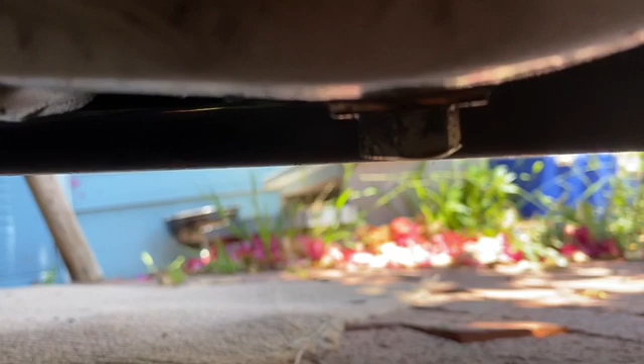Drain plug that we're looking at right here. That drain plug has been always having a little drop of oil on the bottom for about 4 or 5 weeks. So I've been keeping an eye on it, but I'm starting to notice it shift a little bit.

So today I noticed that underneath this, I'm seeing some oil, and under this screw I'm seeing some oil. So obviously driving forward, if it's mainly just leaking from the drain plug, you could get some dripping down here. But it's a little bit harder to make a case for it being so dirty up in here. That makes me think it might be coming from up above, and that maybe the gasket for this whole primary case needs to be replaced.

But I've never had this primary case taken off, so the gasket should be just fine. So what I'm gonna do right now is go buy some new primary synthetic oil, top it off, and just keep an eye on it again. But I might need a new gasket for this primary case, which doesn't make sense if it's never been taken off. Go figure.

I'm really kind of at a loss, but that's where I'm gonna start. I'm gonna put it up on the jack tomorrow, top it off with some brand new primary synthetic oil, and at least then I know I'm not running with the primary empty of oil. And just keep an eye on it, I guess. I don't know.

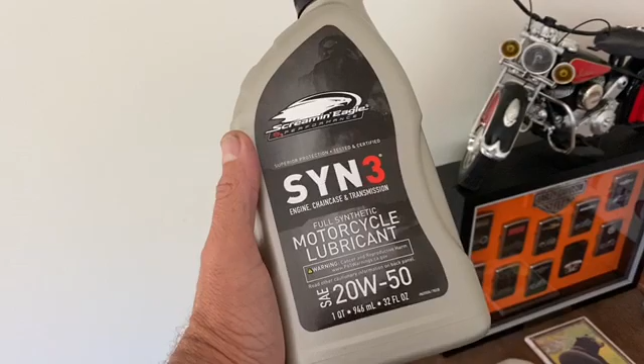Okay, so here's the plan. Can you believe this was with tax almost $15 for one thing of synthetic lubricant that will be used in the primary.

So the plan is tomorrow morning, I'm gonna go to church and confession, but when I get home from that, the plan is to really clean up the bottom of the primary, wheel it out, get it on this jack, and then let it idle. I'm gonna let it idle for 5 minutes, because if you don't have a fan to blow on the engine, you can't let it idle too long.

So I'm gonna let it idle 5 minutes, turn it off, and see if I can see where the oil's dripping from. If not, wait a couple hours, come out and let it idle again for 5 minutes. And just do that even 3 or 4 times if I have to throughout the course of the day, until I can see where the oil is dripping from.

Because I pointed out those 2 primary bolts that it appears to also be dripping from, and that would actually be good news in my mind, because the worst case scenario is there's no O-ring with the bolt for the oil pan. So the worst case scenario is the guy didn't use an O-ring and he screwed it in too tight and he cracked the primary. That's worse. That's expensive to buy a whole new primary.

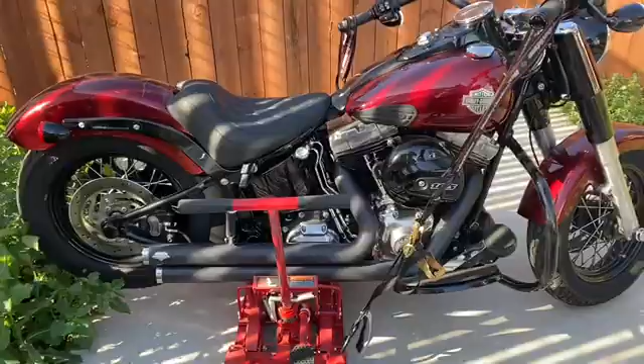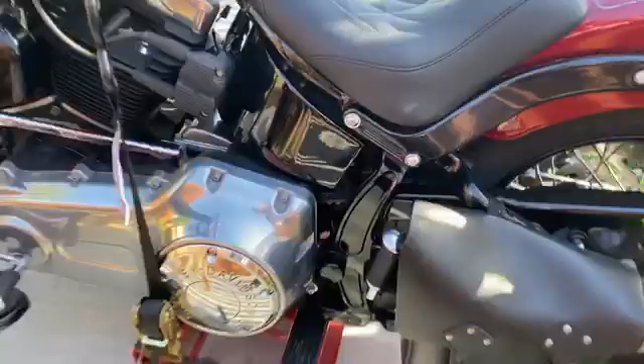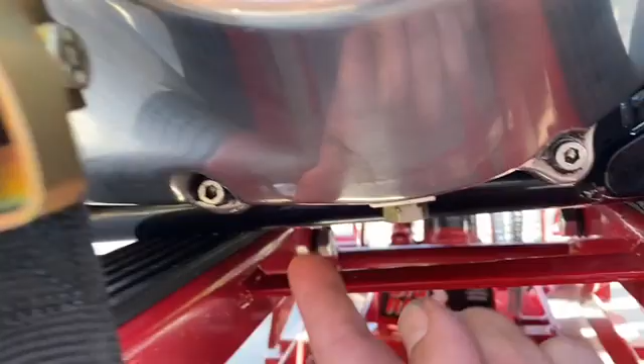Okay, so I got Big Red Betsy up on the jack. Ozzy just can't calm down. And it's real nice and clean down here. So we're gonna watch and see where it comes out. Here, here, or here. This one's really dirty. So I'm wondering if it's this one or this one.

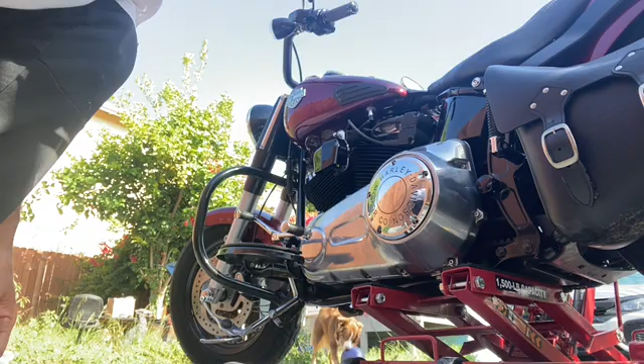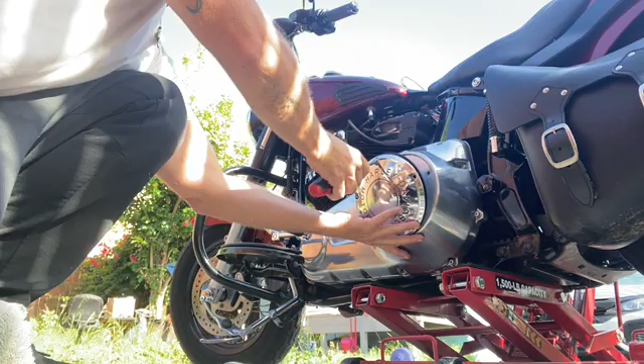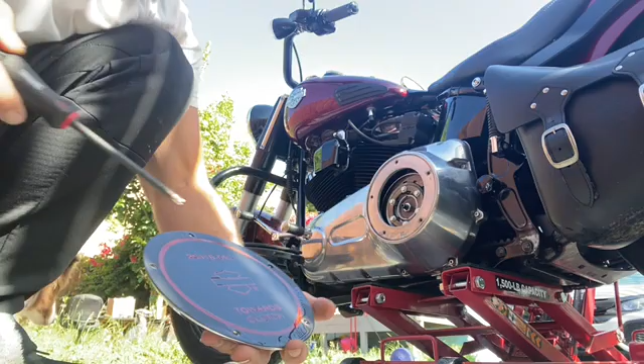Okay, so I think I found out what the problem is. Problem is, this gasket is not the right gasket. The gasket that is right is just a thin piece that goes all around the edge. So the guy didn't even put an O-ring on the drain plug. He didn't use the right gasket.

And I mean, I looked forward to this tune-up and I saved for this tune-up for a long time. And for them to just take your money and not do anything. Okay, now I'm just starting to bitch. But,

You know, I don't really understand it. Just using wrong parts. How hard is it to put on an O-ring?

And, you know, the oil is pretty low right now. It's supposed to be coming right up to the edge when it's horizontal, perpendicular to the ground like this and not leaning on the kickstand. It's basically supposed to come right up to the edge. And it's at least probably, I'd say 15 ounces low maybe, and it's only supposed to take like 31. So I think it's about halfway low.

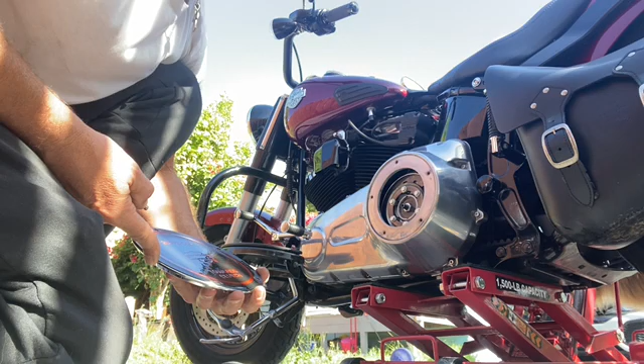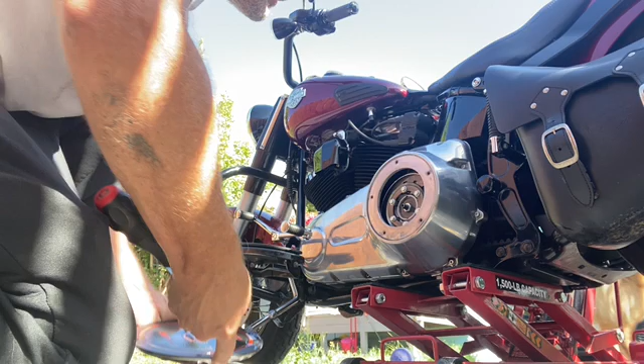So the choice is to go buy a new gasket right now or to just buckle it up. You know what? I want to ride today. I think I'm just going to put in some oil and buckle it up, because what I found was a little line going down here, but maybe I should really make sure that that's the problem. I think it is though, because look at how much oil's out here. Damn it, I think I'm gonna... decisions.

Might as well do it right. I'm gonna go get the new gasket. Might talk to the manager too. I mean, how hard is it to throw on an O-ring?

But what good would it really do? I mean, all that manager would do was go, oh, this guy's having a bad day, or this guy's in a bad mood. He won't actually do anything with it. Or think, let's see if we can tighten up our service department. I don't think they think like that.

So now I gotta wait for the Harley shop to open. Darn it, it's Sunday. I'm not even sure if they're open on Sundays. So that's what I'm gonna do next, check on that.

Okay, so as I said yesterday, this lubricant cost me like $14.95. I got the receipt for that. I'm gonna try to get them to pay for the gasket, the correct gasket, which should have been covered in my 20,000 mile tune-up, and this, because I shouldn't have to pay for this to replace all of the lubricant that I lost on the road because the seal wasn't correct.

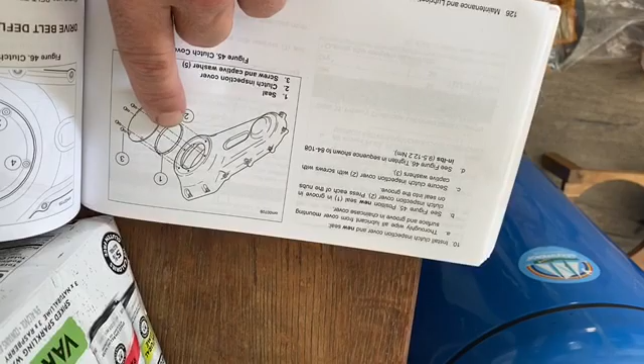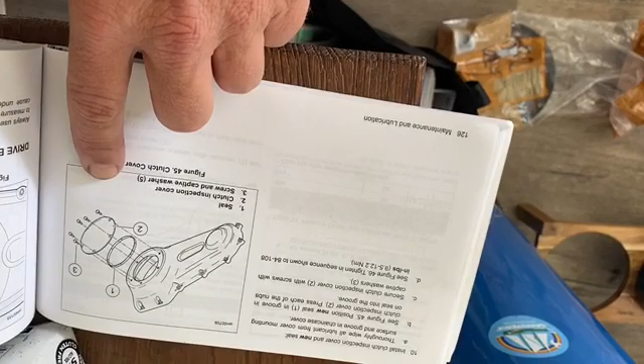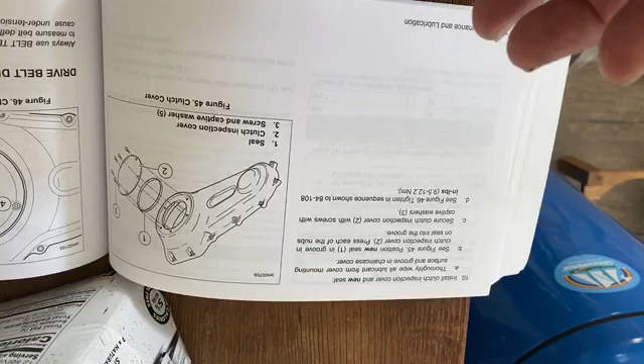See here in the owner's manual, you can see the seal is, just like I said, one little ring that goes around the edge in between the primary cover and the clutch inspection cover. So it's just one ring. It's not that big flat thing that he put on, and it didn't fit properly. So that's why. The idiot, he didn't have the right gasket, or the right seal, they're calling it here.

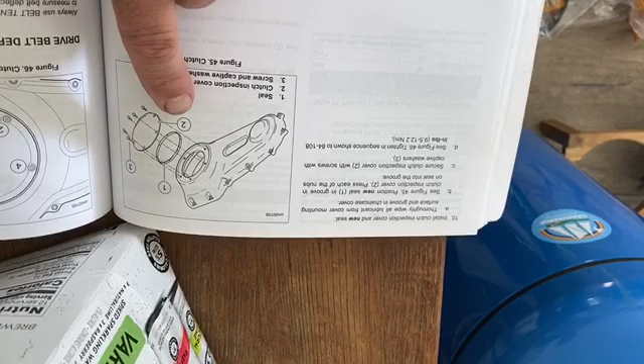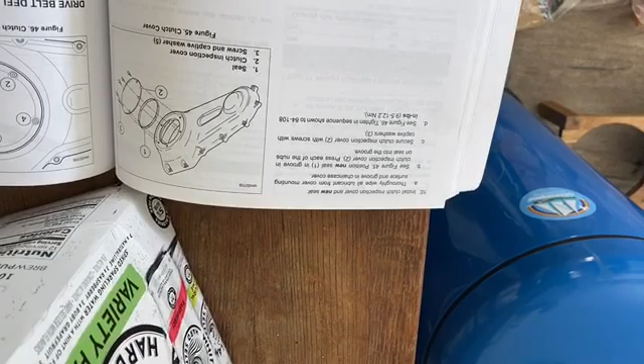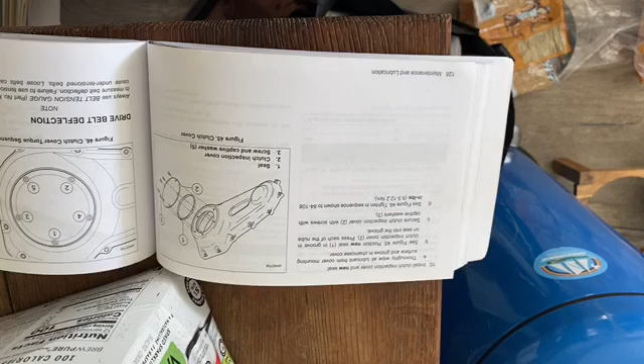So he could have just used the old one. I mean, I've used the same one ever since I got the motorcycle. No, I've only changed it once, but I mean, they never leaked. And I did several primary changes before I changed it out. So that's what he should have done. He should have just used the same one instead of one that doesn't fit properly. And I'm gonna ask for an O-ring, since he didn't even bother to put an O-ring on there.

Okay, I'm gonna stop complaining once again.

Okay, I'm driving home from Harley, and that was a waste of time. But as I said, I took the receipt for the synthetic oil, I took the wrong gasket, and damn it if the service department isn't open today. So I waited for 11. It was like 9:15 when I decided to go, but they didn't open until 11. So long story short, I got to come back Tuesday, not even tomorrow.

So tomorrow's Monday, so I'm going to go home, top off the synthetic oil, put the bad gasket back on and the cover on, because it's Sunday. I got to go for a ride, right? I mean, I just won't feel right otherwise. So that's the plan. And then it takes just a couple minutes to... well, I'll have to get it back on the jack. That took some time.

But it's all good. And the guy I spoke to felt confident that they would reimburse me for both the gasket and the synthetic oil. So I'll keep my fingers crossed, and I'll start filming again regarding this on Tuesday. Hopefully it all goes well.